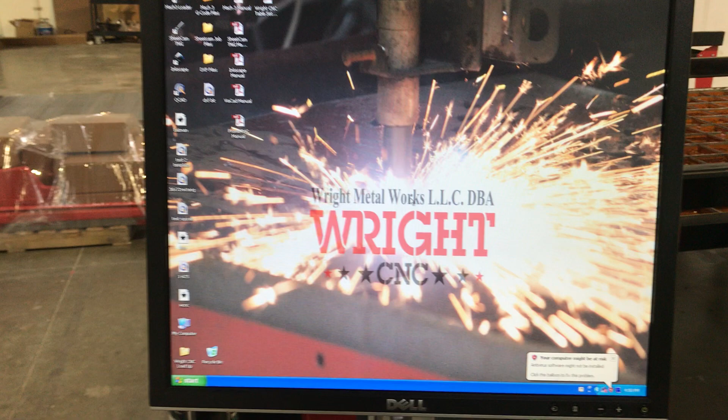Morning. Today we're going to discuss the process of cutting a file from the design finished to the actual cut on the table. And this is going to be one of a series of cuts that we're going to walk through. This is going to be one based off of the test file that's available on the computer, pre-built onto the computer that you get when you order a Wright CNC machine.

Now we're going to be doing this with a handheld camera because, of course, this is going to involve both the actual computer itself and the table, and it's much harder to do a screen grab and then go over to the table. So we're going to be doing this by hand to give you that personal experience. All right, let's hop straight into it.

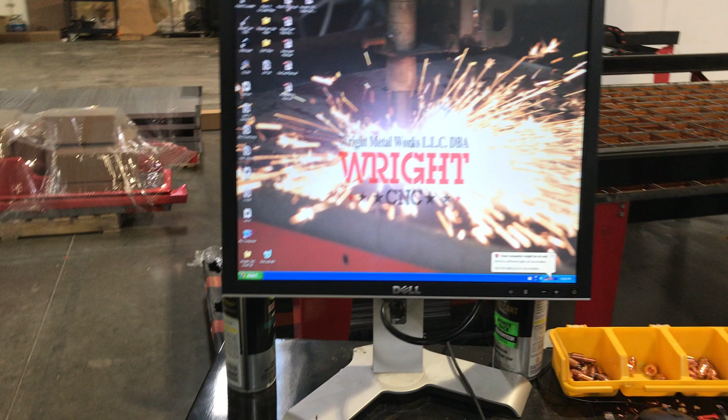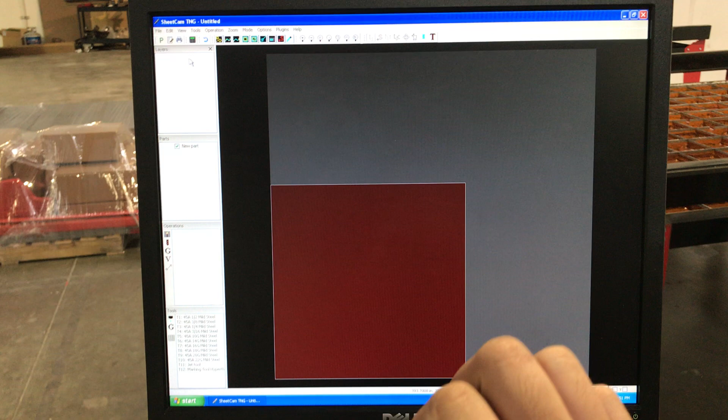So once we have our design built, in this case, we're going to take one of our Wright CNC test files. We're going to go over here to SheetCam, double-click to open up SheetCam, and SheetCam opens up. Now, we have this red area that represents the basic size of the sheet that we have here, and the gray area is representing sort of a generic table size.

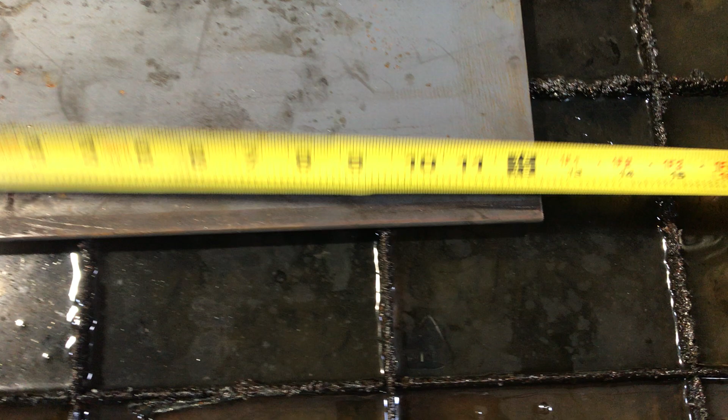But let me go ahead and we're going to grab something from over here. We're going to do this together, folks. I'm going to grab myself a measuring tape. I'm going to go over to my sheet of material and take a quick measurement here. I know my material is going to be approximately, we're just going to go with an approximate here. It's going to be just about 12 by 12. It's going to be a little under or a little over, but that's fine.

Once we have the basic specs on our material, I'm just going to go up here to options, go to job options, and I'm going to say this is going to be 12. Now notice this shape has also changed a little bit, 12 by 12. There we go, 12 inches by 12 inches. Thickness of my material, I don't need to worry about that in this particular type of process. This is just for routers, not for plasmas.

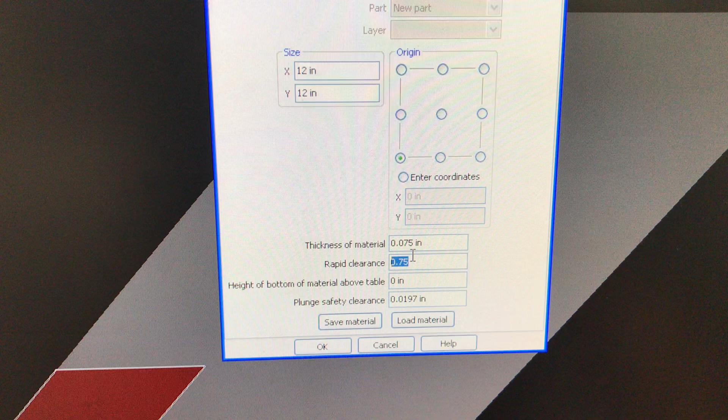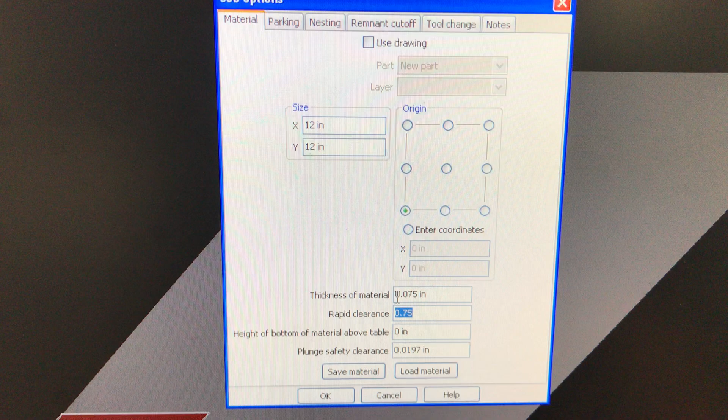And then, of course, rapid clearance. Rapid clearance is the one thing we will worry about. That's the distance vertically that the torch will travel to start its moves between cuts. That is to say, it'll cut at a lower position, and then when it needs to go to the next starting point, it'll lift itself up in order to clear itself from any of the tip-ups, and that distance is defined by this here, that rapid clearance. So it's going to go up 3/4 of an inch, move to the next cut, come down 3/4 of an inch, and then begin its next cutting process. I'm going to leave that at 0.75.

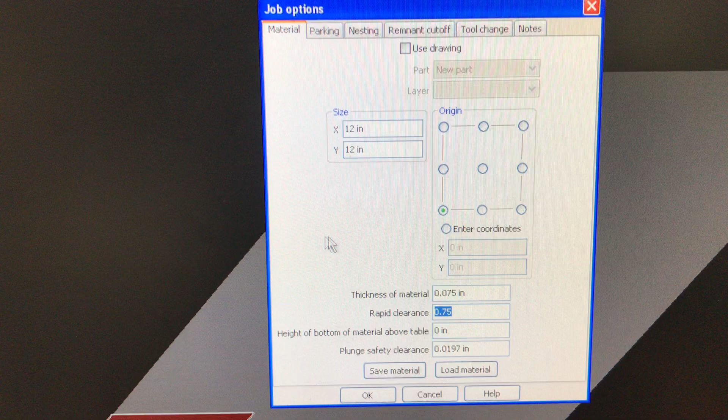My origin is in the bottom left-hand corner. That means that my cut will start at the bottom left-hand corner, or that's where the design bottom left-hand, the G-code bottom left-hand corner, that 0,0 is going to be right there. Perfect. Okay. We're just going to go ahead and hit OK. And now I have my material. I'm clicking and moving the material to the middle of the screen because it's sort of a personal preference, actually. All right. So we have our imaginary sheet of material.

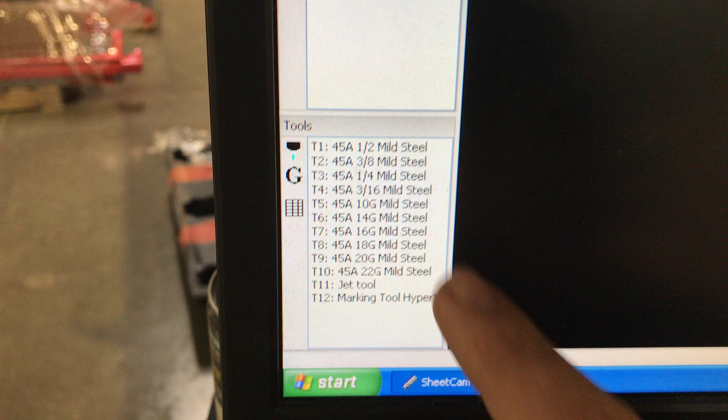We have different options on our screen here. Down I have tools. Tools will allow me to determine what speed I'm going to be cutting at, a couple other settings. Those will all be determined down here. As a matter of fact, let's take a quick look. I'm going to click on my 16 gauge mild steel tool. 45 amp, 16 gauge mild steel. That's right. I'm going to set my plasma cutter to 45 amps. I'm going to be cutting 16 gauge. But in this case, looking at the plate on the table, I chose 1/4 inch.

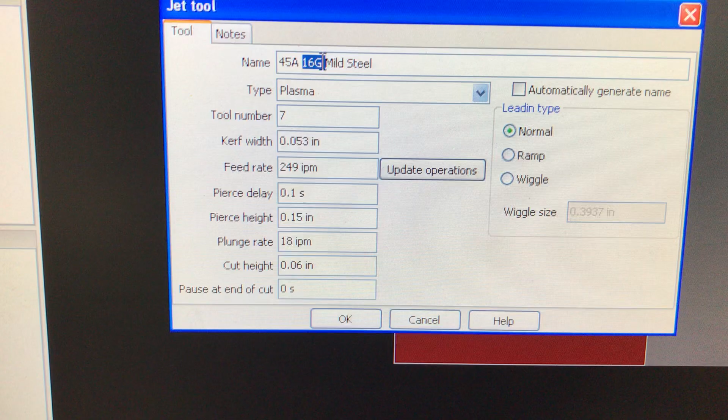So I'm going to exit out of here. I'm just going to show you what the 1/4 inch tool looks like. Okay, there we go. 1/4 inch mild steel. This is tool number 3. The kerf width is already calculated by Hypertherm. We can make adjustments to it if we want, but that's not really necessary at the beginning. Feed rate, that's how fast it's going to be cutting. So it's going to be cutting at 48 inches a minute.

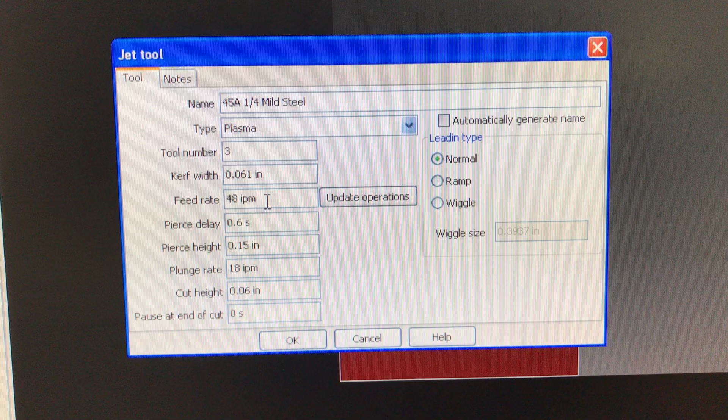It's going to have a pierce delay, so that's the amount of time the plasma cutter is going to wait in one position in order to pierce all the way through the 1/4 inch material. In this case, that's 0.6 seconds.

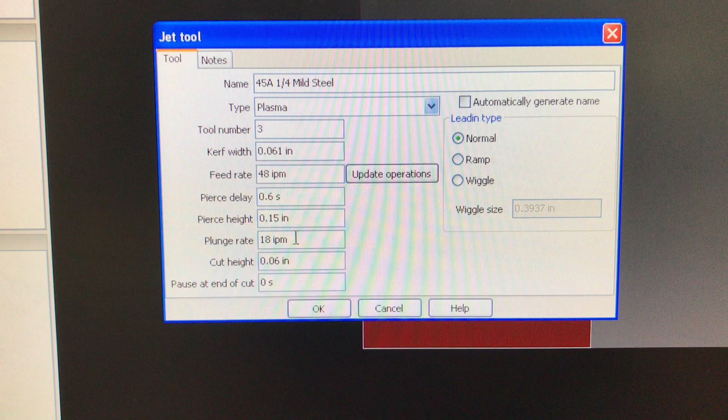And then the pierce height, so this is something determined by Hypertherm, will start off at 0.15 inches off the material. It'll go at a rate of 18 inches a minute and come down to the cut height of 0.06, or about 1/16 of an inch off the material, in order to maintain that cut. Okay, cool. So I just hit OK.

I wanted to make sure that we saw what a tool set looks like and what some of the things mean. Again, we're going to have another video that goes in depth on each of those tools and how to measure and adjust for those tools as you're working with it. But for right now, that's all we're going to do in terms of tools and tool sets.

Next up, we have operations. When we bring in a part, we'll be dealing with operations. Operations are just cut paths. Operations are those tool paths necessary to make a cut. I want to make a cut is similar to saying I want to make an operation. An operation is a cut or a cut path. And then we have our list of parts. So whenever we import a new part into the program, we'll see it listed here.

But without further ado, let's go ahead and import a part. I'm going to go up to my file. We're going to go to new part. Perfect, new part. It's going to bring up this screen. We're in G-code files. I'm going to go to my desktop. I'm going to go to my DXF files. And right down here it says files of type. And it has SVG. I know my parts are going to be DXF, so I'm going to click on DXF.

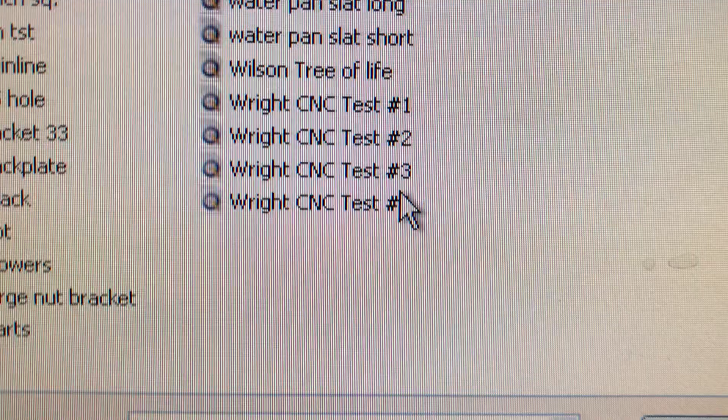Okay, now I have multiple files on this computer. We're going to go to Wright CNC test number 2. There we go, test number 2. And I'm going to hit open. Now we're in DXF files, Wright CNC test number 2, and we hit open. Beautiful. Now we get this screen here. It's called drawing options, and we have a couple of different options.

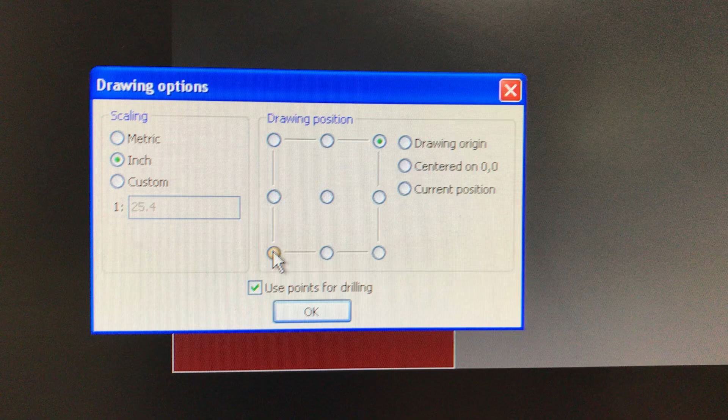I'm going to go with inches because that file was originally built in inches, and we're going to go drawing position down at the bottom left hand corner. Now the reason behind this is this allows us to position in a very vague sense the part on the material. So we can choose, do I want it to start in the top left hand corner, not the origin, mind you, that's different. What we're talking about is drawing position. So we want the piece to start in the bottom left hand corner.

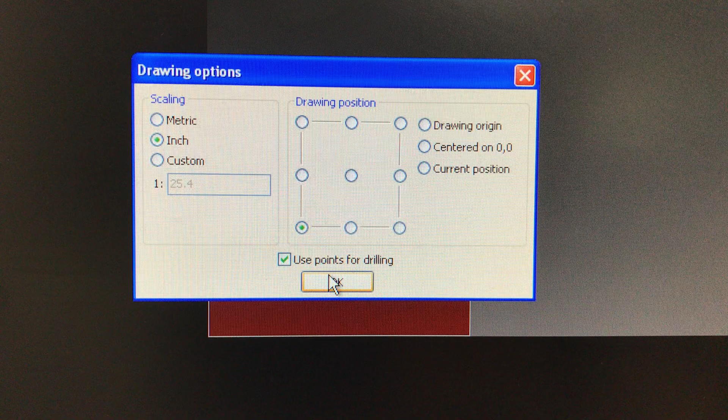And when I hit OK, you'll see, there's our part. We're going to zoom out here. You're going to see that in relation to the sheet, it's at the bottom left-hand corner. Now, a couple of things we're going to note when we're looking at this art file. We have yellow on the inside, red on the outside. SheetCam understands that there are inside shapes and there are outside shapes. And that'll come into play when we start to deal with offsets. But you'll notice here that the inside is yellow and the red is outside.

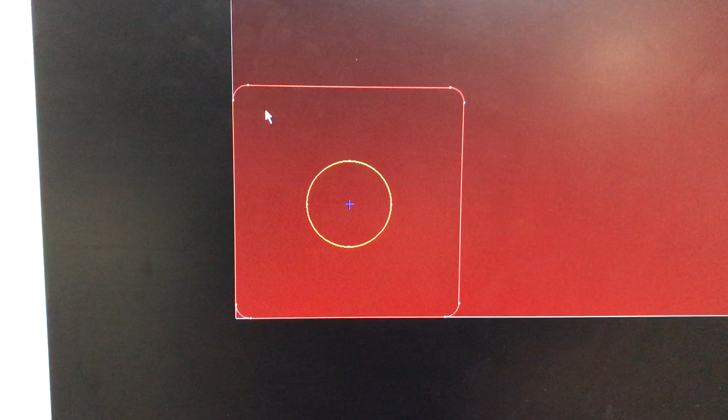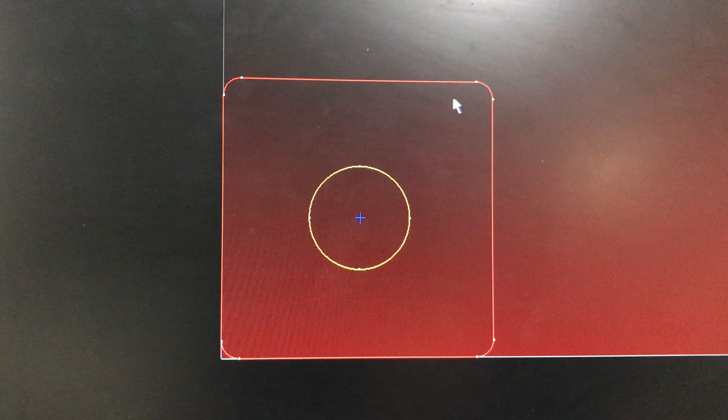If we notice that there's red on the inside, then there's something wrong with that file. Either a piece of the vector is on the wrong layer, and we'll talk about layers later. And then if this outside layer was all white, now you're seeing, hope you're seeing red there. If the outside layer is all white, then you'll notice that that part isn't actually a complete shape. An incomplete shape is just a line, and lines don't have insides and outsides. They're just lines. So we'll get into that further in another video.

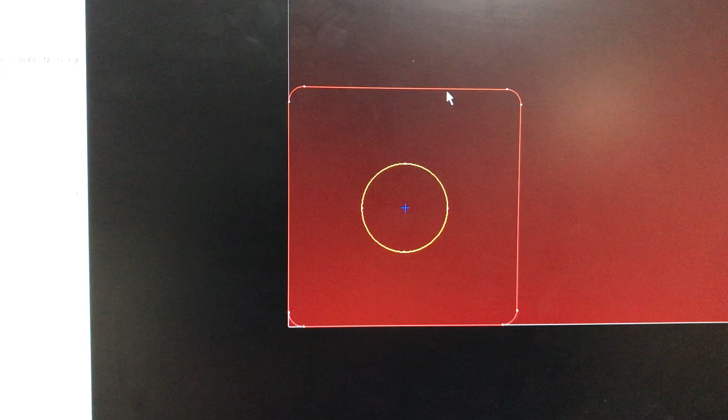Let's keep trucking along. We have a part listed here. It looks good. It has yellow on the inside, red on the outside. Everything is the way that we want it to be. If there's red inside of a yellow, that means it's going to drop out because we want the inside, that yellow, to drop out when we're making this cut. So we're going to go to operation here.

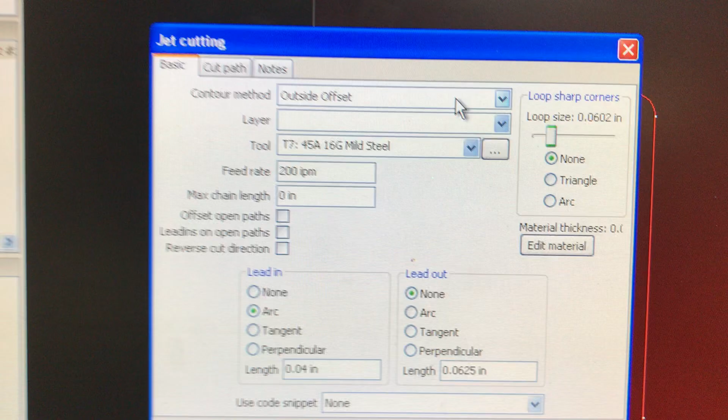We're going to click create a new jet cutting operation, or we can go up here and go to operation and click plasma cut. Either way, it'll get you to this screen. Now we want to make sure, first off, our contour method is on the outside offset. That is, like cutting a 2x4, we're putting the blade width on the outside of our cut. And then anything that's an inside cut is going to be cut from the inside. So we want to make sure that's the case.

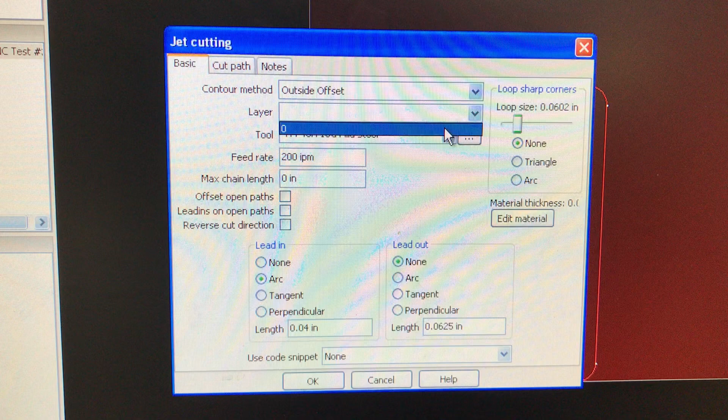Next up, we're going to go to our layers. We always select a layer. Always select a layer. In this case, this layer is called 0. Now, you may see a number of different things listed there. You just always have to make sure you select whatever is there. Otherwise, it won't know what it's cutting. You may have more than one layer present on a part, and we can show you how to adjust for that to bring it all onto one layer. So just keep that in mind. Always select a layer.

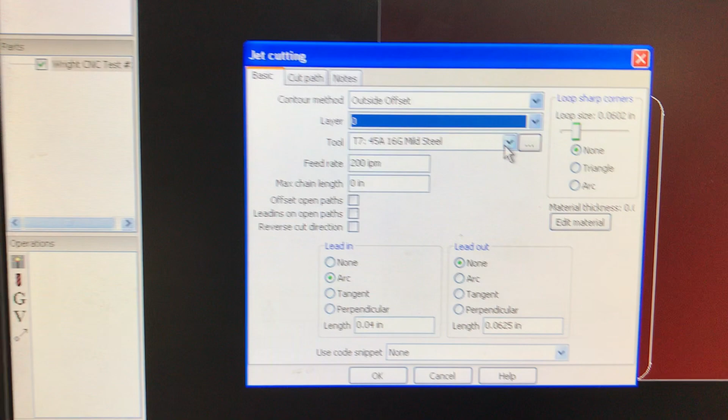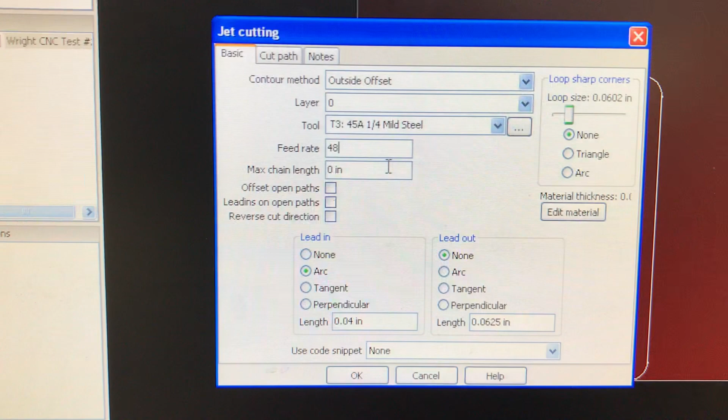Next up, we're going to have to go to our tools. We'll click on the drop-down menu here, and we'll select our 1/4" mild steel tools. Perfect. And it's automatically going to update our feed rate here. Our feed rate is the speed at which we're cutting, and that looks great to me. On the newer versions, there's also something called overcut. We're not going to be discussing that here, but I just need you to be aware that that is an option that you'll see on your screen, so don't freak out. That's there on purpose.

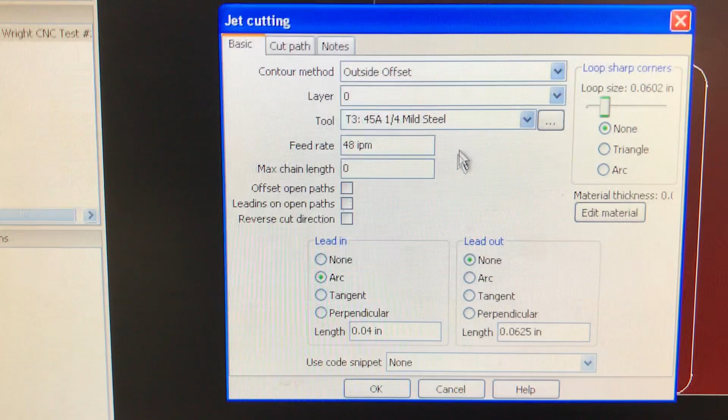Okay. Next up, we have loop sharp corners. Again, a feature that we can talk about in a later video, but not something we're going to address currently because we're not going to be working with this as we first get into plasma cutting. We can sort of explore that at a later date. We can discuss these also as well. Again, I'm going over the basics of cutting, and we don't need to discuss those things at the very basic level. We'll expand upon that later.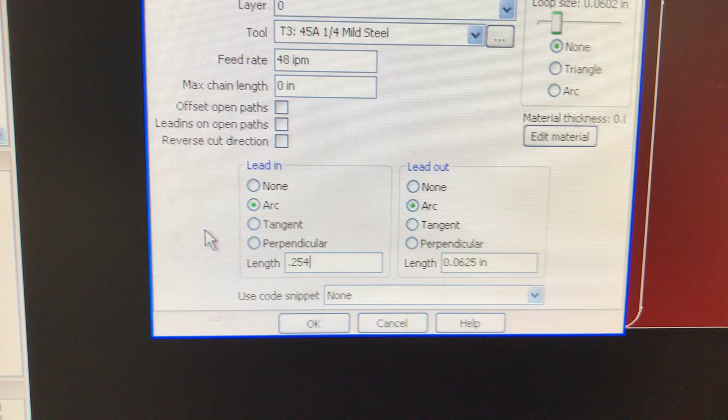What you will need in order to make a cut is our lead in and lead out. In this case, I'm going to do an arc. And there's one very basic rule when it comes to your lead in and lead out. Your lead in and lead out lengths have to be at least equal to the thickness of the material. So 1/4 inch material has to have a lead in and lead out that is equal to that 1/4 inch at least. The other thing is we've chosen arc, and I will show you what that looks like when we go to the next screen. So we're just going to hit OK.

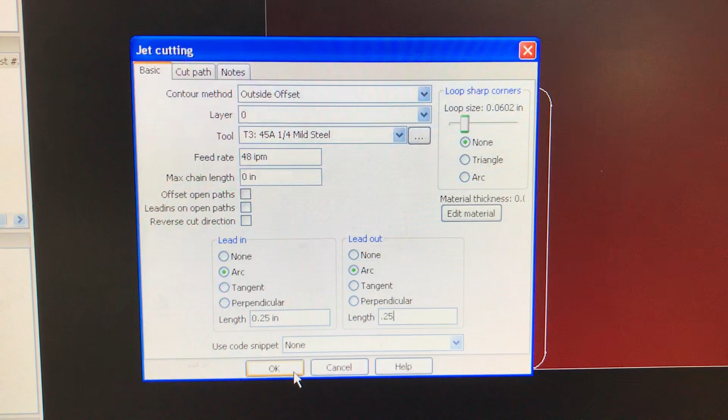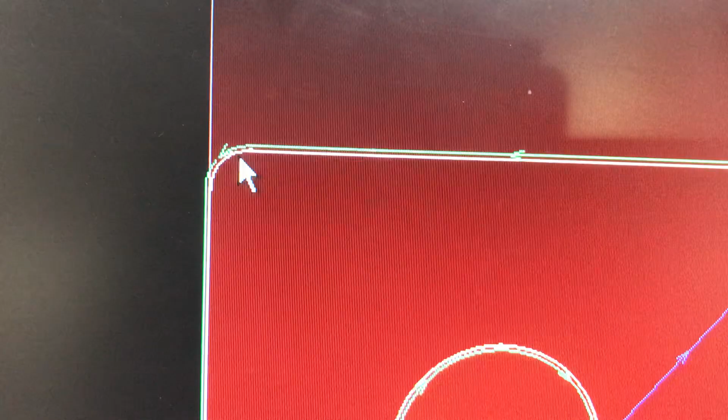Okay, and here we go. So you'll notice here that it has this little arc and another arc here, and again, 2 similar arcs. When we said outside offset, that means that this line is on the outside of our vector, and this line is on the inside. And to give you a better view of this, we're going to take a look here. We're going to notice that our part is listed here in white. You'll see that the blade, this little green arrow on the outside, represents the outside edge of the cut, and you'll see that it's making an outside cut.

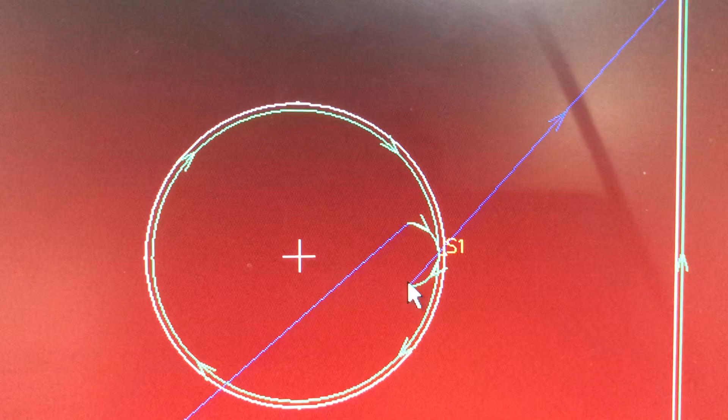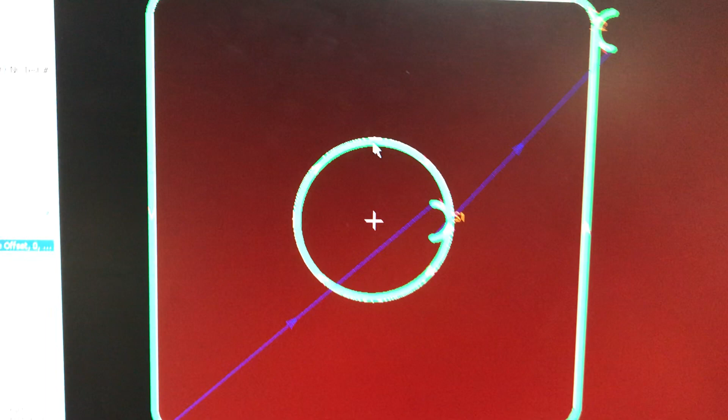On the interior cut here, you'll see that the vector is on the outside and the cut path is on the inside. And the arc puts the pierce here, cuts in, makes a full circle, comes out, and then arcs out. This is your arc in and your arc out. This makes sure that the pierce point for your plasma cutter is set to the inside of the dropout and the outside of the major piece that you're trying to cut. So keep that in mind. Once we're here, it's good enough to cut.

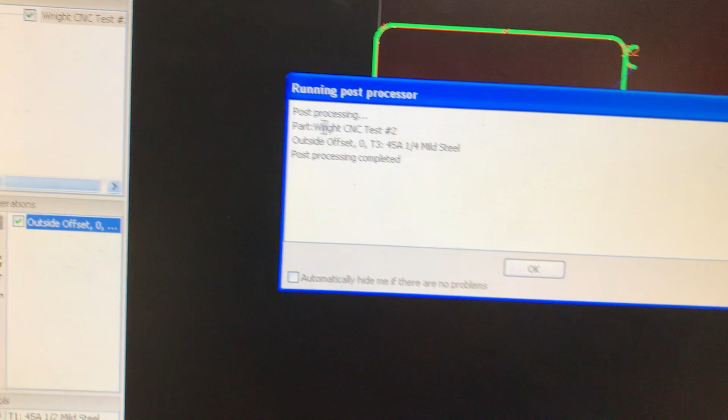So we go ahead and go File, Run Post Processor. Okay, Wright CNC test number 2, and we're just going to call that number 2.5 and hit save. Perfect. Nothing shows up here. Our file name is in white, so we're good to go. And I like it. Okay, we hit OK. There we go. Now we're going to minimize out of the screen, and we're going to go into our Mach 3 loader here.

We're going to go into Profile Update 418. We have multiple profiles over time, and you'll see others, but in this case, on this system, we're using the 418. You may have a more current version. I would use that one, unless otherwise stated to you by tech support, aka me, or hopefully someone else as well. There we go. We hit OK, and we open up Mach 3.

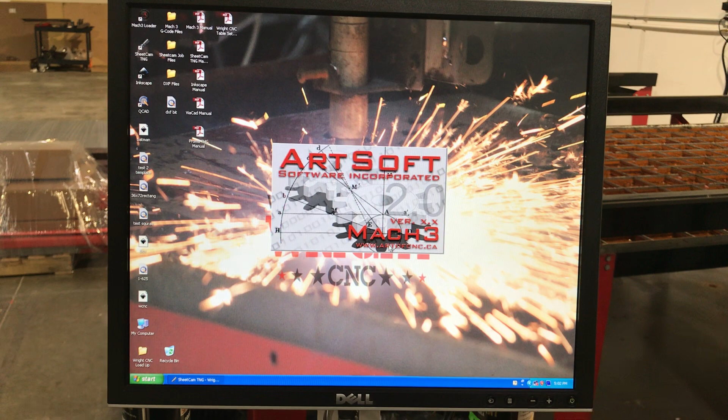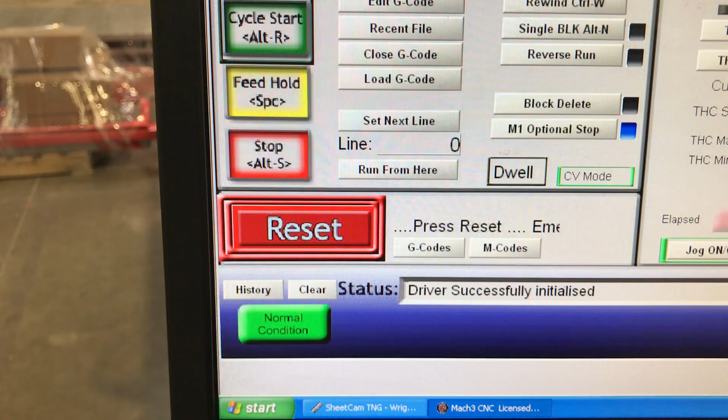Okay, and we're waiting for Mach 3. Beautiful. There we go. And we see that it says reset in the left-hand corner here. We're going to click on it for it to hit the reset there. Look at that. Now it's solid green. We have this all set up.

Now, if I were to try to move with my left, down, or page up and page down, if I were to try to do anything, it'll change the numbers on the screen, but it doesn't make any changes on the table because the control box is off. Let's take a look at that, and we're going to turn the control box on. And would you look at that there?

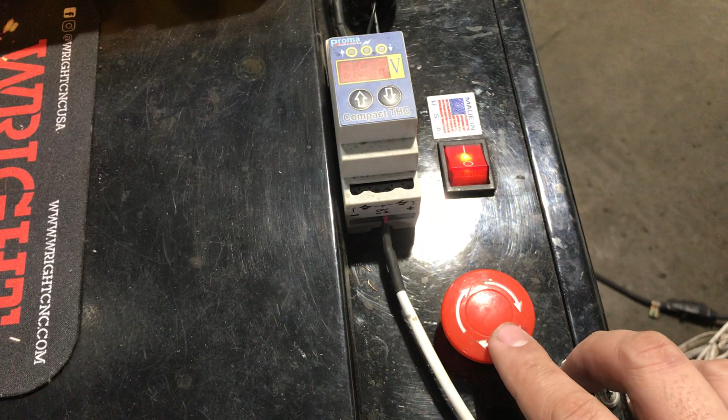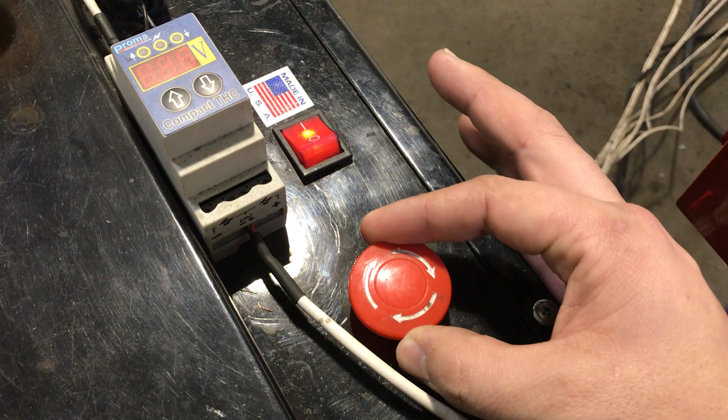Okay, now see this big red button here? If I were to hit that red button, it'll actually set an external e-stop. We fix the external e-stop by turning it to the right, and it pops out. And in that way, I can now hit reset, and it allows me to move the table.

So we're going to check a couple things. I'm going to hit the up button, and the up button's going to move it away from me. I'm going to go to the down button. Down button's going to move it towards me. Left button is going to move it left. Right's going to move it right. Page up is up, and page down is down.

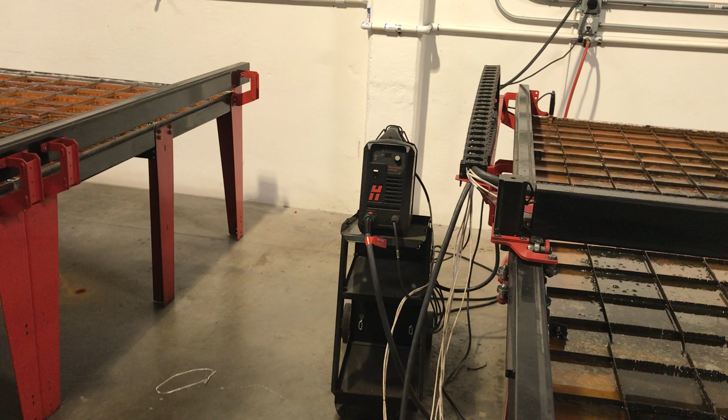Okay. Now that we're here, I'm going to keep my plasma cutter off for this, as we're not going to be cutting this. We're just going to walk through all of the steps necessary to make this cut. And then in the next video, we'll show you a full cut from design to cut. But this is how we deal with our first dry run cuts, to get an idea of what it's going to look like when it's moving. So we'll keep our plasma cutter off to do what we call a dry run.

All right. So we're going to go ahead and, using our left and right, up and down keys, move the torch to the bottom left-hand side of our sheet. Let's take a look here. Nope, not quite bottom left-hand side. I'm going to go ahead and bring it forward, and I'm going to hit my page down button here. Okay. And that looks pretty good.

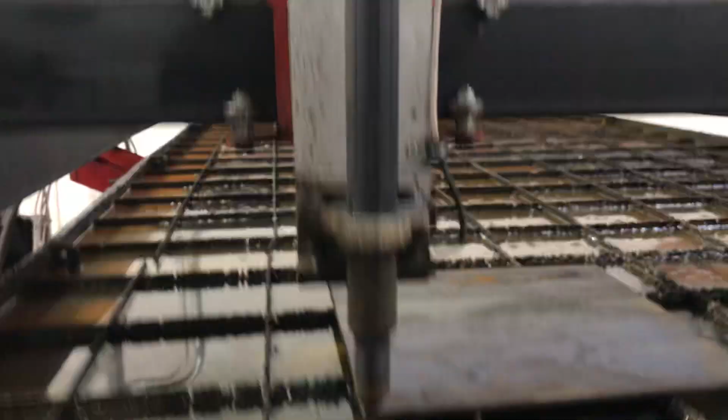Let's take a look here. On this side, it looks like it's on the material. On this side, it looks like it's on the material. Wonderful. I'm just going to raise it up a 1/16 of an inch or so off the material, giving myself a little bit of a gap there. Okay, that's going to be my 0 point.

What I'm going to do first, I'm going to go to load G-code, and we're in our desktop Mach 3 G-code files, and we'll go all the way down to Wright CNC 2, 5, and hit open. Okay, fantastic. Now, you'll notice up here it's saying it's way over here in the top right-hand corner. That's not okay. I'm going to go ahead and zero out my X, Y, and Z. My 0 is on this position.

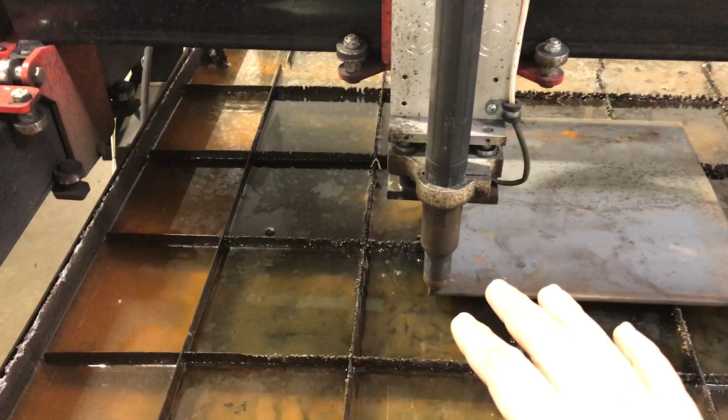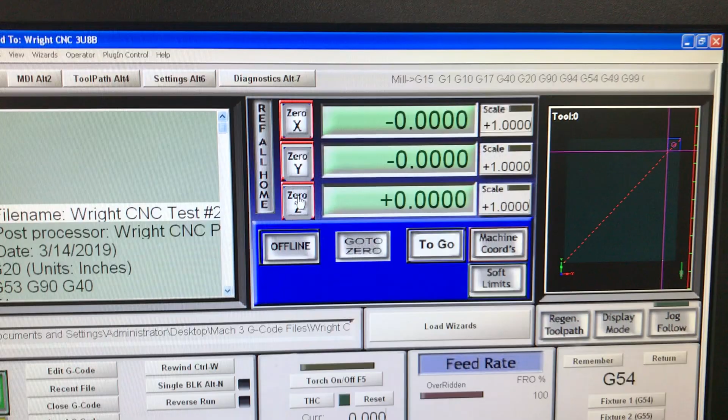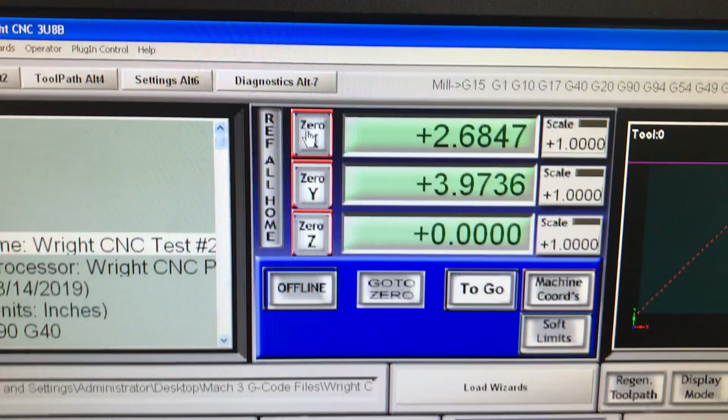Now, does that mean that if I move my plate over here, I can then move my torch over here, and I can set this as my new 0? Yes, but I'd have to do the same process I'm doing here once I move it to the bottom left-hand corner of the sheet that I want to use. Or, you know what? Maybe I don't want to do it there. Let's go ahead and move it right here, smack dab in the middle of the sheet. Okay, now that I'm there, 0 X, Y, Z. Now, before we hit cycle start, whenever we make a new 0, we have to press one button, and one button that's more important than anything else you could do in this program.

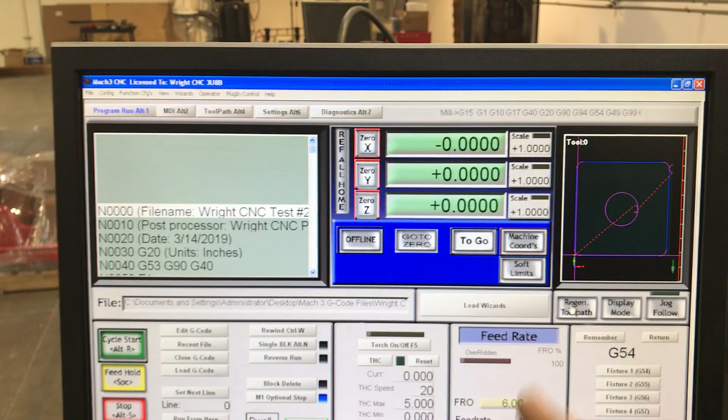One button, Regen Toolpath. You'll notice it pops up properly in the screen, Regen Toolpath. It takes all of the G-code that was written for the previous 0 and ensures that this is now following the new 0 in the system. The new 0 that we just made is now applicable to this G-code. We hit Regen Toolpath, and we're good to go.

Looks like that's there. In an actual cut, we'll make sure our plasma cutter's on, that our air components are also on. We're not doing that right now because we're doing a dry run. Okay, moving on. Here, we regen our toolpath. 0, 0, 0. There's no errors going on right here. You'll see it in the status bar. It's not there. Okay, we're going to hit cycle start.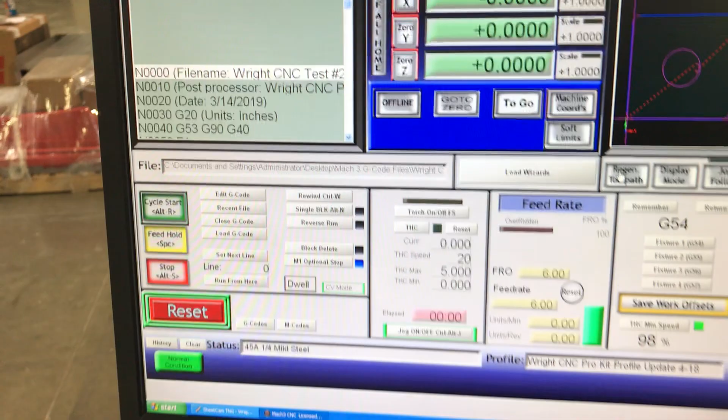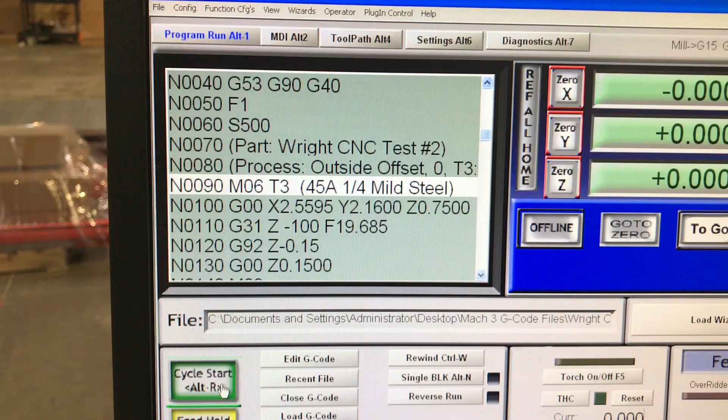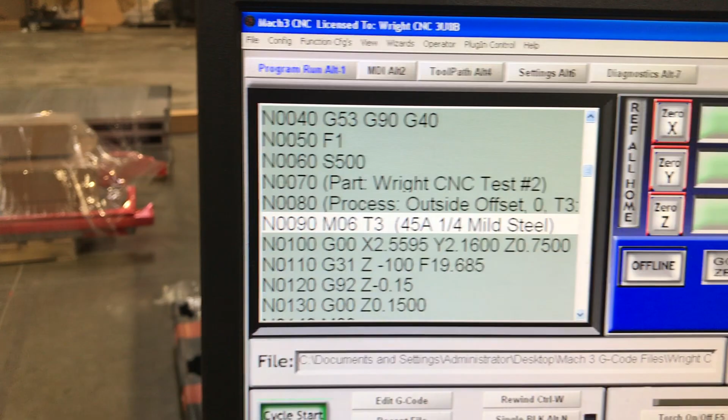And it's going to stop right there. It'll say press cycle start after tool change. This is something built into our profile that allows us to pause if we do need to double check what tooling we're using. I do double check this. This is 45 amps on 1/4 inch mild steel. If I notice that I'm using 16 gauge mild steel and I see that I have a 1/4 inch mild steel written part, you're going to run into a couple of issues there.

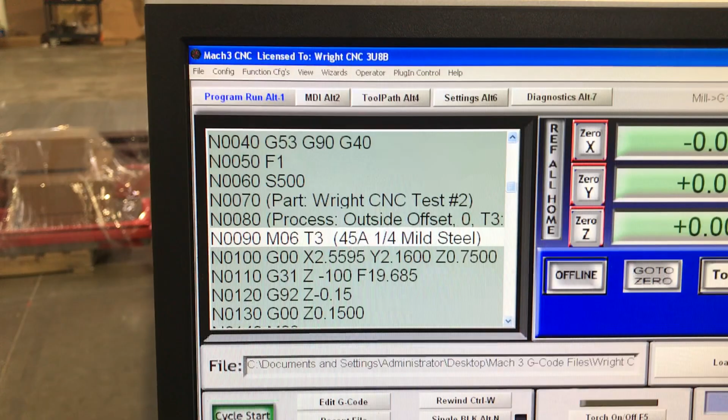So this is your chance to double check that you have the right consumables, the 45 amp consumables, and the mild steel all set at 1/4 inch. Good way to double check. Look, I got that 1/4 inch there, and I'm actually not running the right consumables. These are fine cut consumables, and those will not cut through a 1/4 inch properly. I'm gonna have to change that when I do an actual run, but for right now, I don't need to worry about it. We're just gonna do a dry run here.

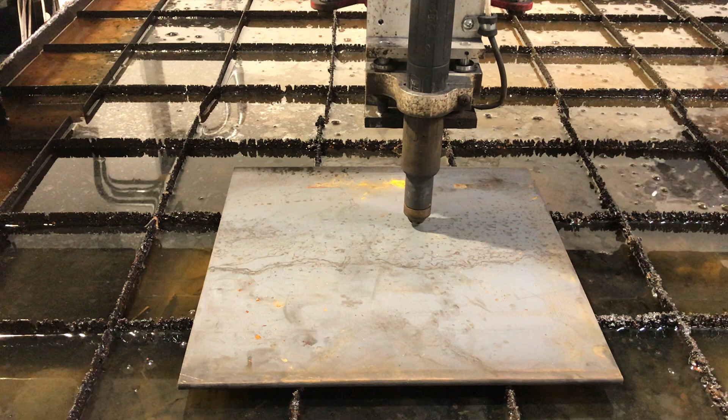We'll hit cycle start. Then it'll go to the first cut, come down, touch the material, lift off the material, and then simulate an actual cut. Right now it's going 48 inches a minute, and it's simulating the circle and the arc out. Perfect. Moving to the outside edge, coming down, and look at that. That's fantastic. So it's making the cuts in a simulated manner. 4 inches by 4 inches with curved edges. I like it. Keep going.

Good. It's going to come around and arc out and lift up. There we go. And that's the end of the cut. Beautiful. Let's go ahead and do that again, except I'm going to have you listen to one other thing. So we're going to move our Z-axis to a different position, and I'm going to hit page down so that I'm 1/16 of an inch off the material there. Looks about right to me.

We hit 0, X, Y, Z, regen toolpath. Okay, we're good to go. This is our new 0. We're going to go ahead and hit cycle start. It's going to stop at the first tool set, 1/4 inch mild steel, 45 amps. If I was running the plasma, that would be important. We're not doing that now. We hit cycle start. Oh, I am sorry. Let's retry this again. And there we go. Coming down, lifting off, and simulating the cut.

Now, if you listen to the control box very closely, you'll hear that every time the plasma comes on, it's going to make a click. You're not going to hear this with the plasma cutter running because the plasma cutter is really loud. But in this dry run, you should hear a click every time the plasma cutter should be on and a click every time the plasma cutter should come off.

That signifies that the relay is actually working, and the relay tells the plasma cutter exactly what it should be doing. So that looks like it's going to be a successful cut. I can go ahead and turn on my plasma cutter and give this another cut, and we can do that in another video. There we go.